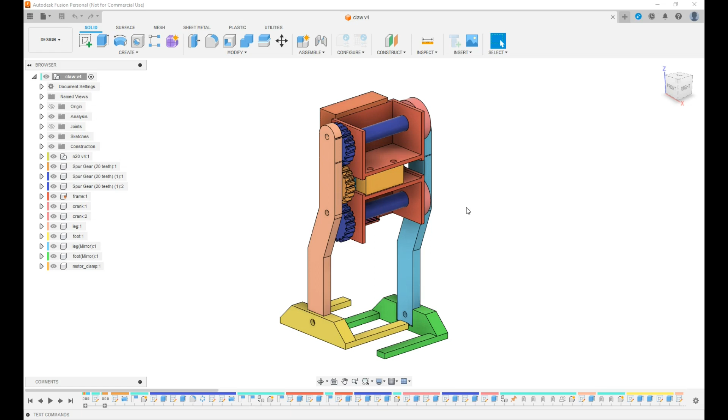This is part 3 of a video series I'm doing on designing a clawfoot walker, a mechanical toy in Fusion 360. In this video we're going to start by fixing some of the things we screwed up in our last video. One of the things we didn't get right was this crank, so let's activate it and isolate it.

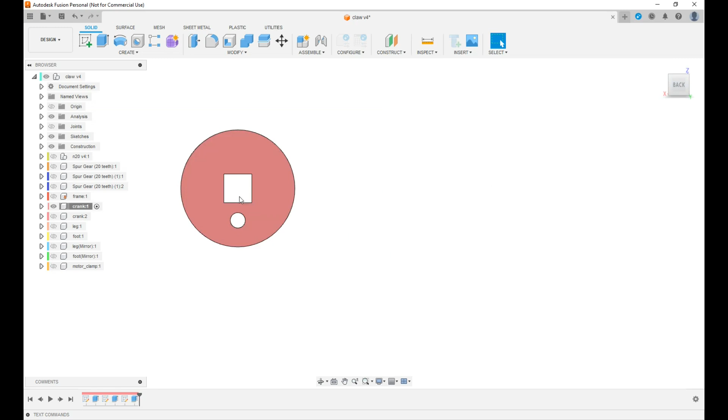The problem with it was this square hole that we fit our other shaft into is too loose. So where did we do it? I think we did it in the first one here, and it is this offset that we need to change. It's 0.2 now, I'll change it to 0.1. Make that a little tighter.

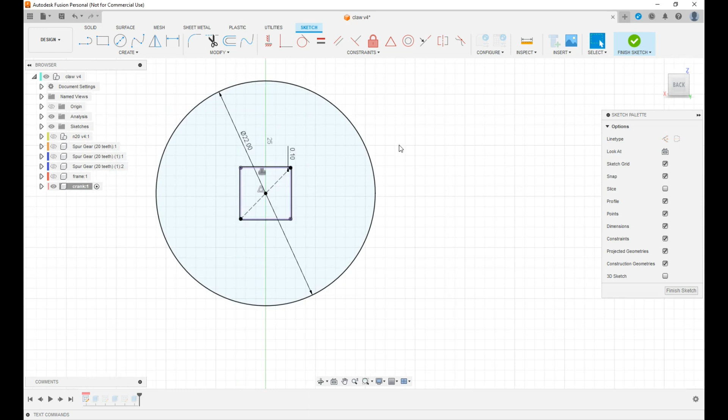The other thing I want to change is I want to add a couple of chamfers. We'll make it 0.6, and we'll put a chamfer on our screw hole, 0.4. Make it a little easier to start.

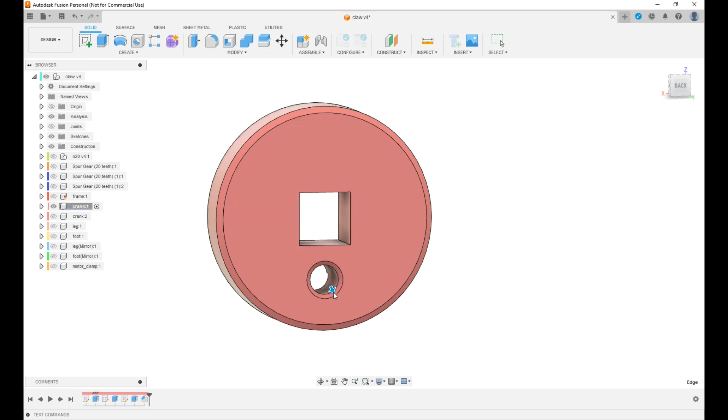Let's unisolate. Come back up to the claw, to the whole thing. Make sure we're at the end of our timeline, and you can see if the changes took effect on the other part because it's an exact copy of the one we just changed.

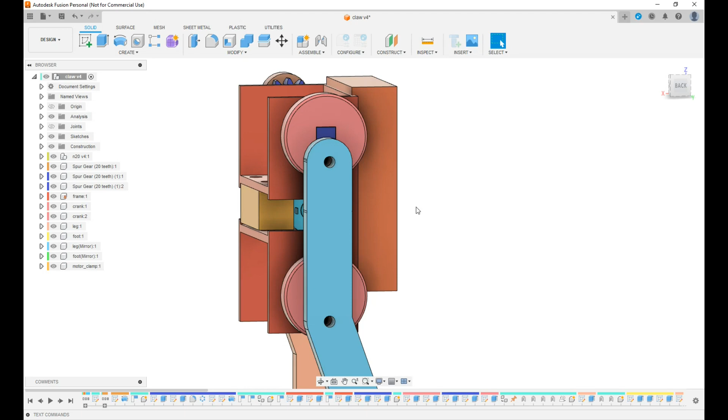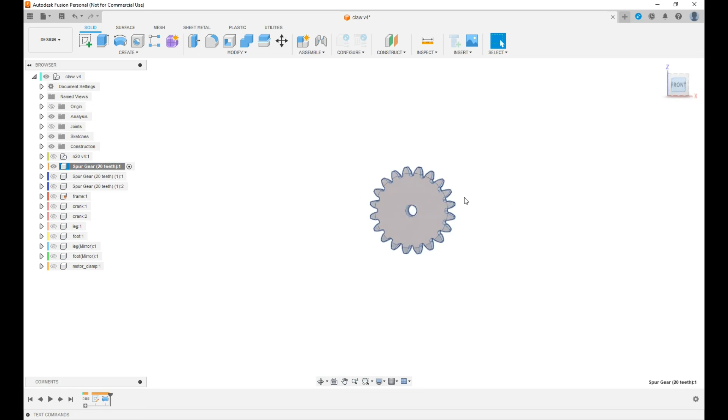Now we want to change this gear right here. Let's see, we'll isolate it. What I did wrong with it was I forgot to put the proper sized hole in it and the flat on it.

So we're going to project in this circle. We'll select it and make it a construction circle, dimension it, see 3.2.

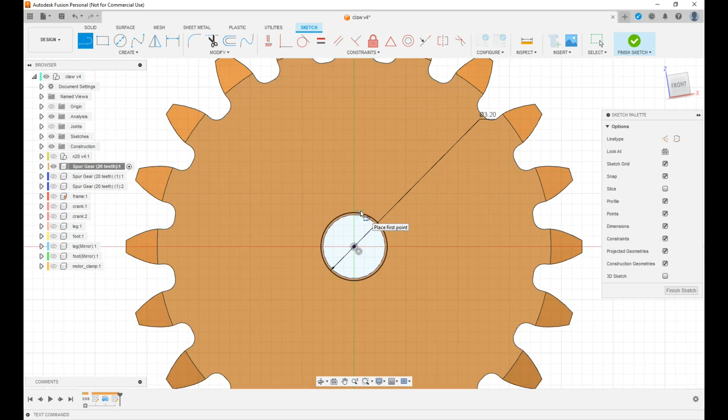Now we need a line to make a flat for the shaft. We'll dimension that from the center, 1.25. I think that's what I've used in the past.

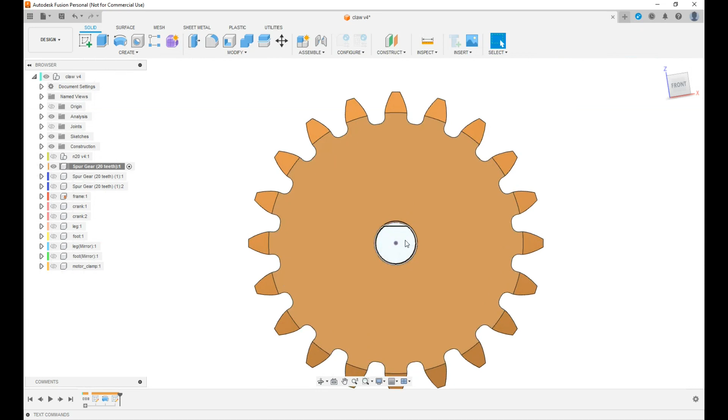Now we'll finish that. We're going to extrude. The first thing we can extrude the flat. Is that going to work? I think so. Distance to object. We want it to join. That's good.

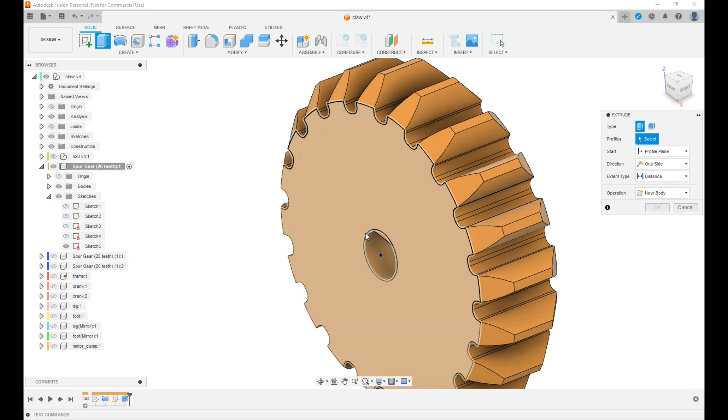And it killed our sketch, so let's bring it back. Extrude. Make that hole a little bigger. Distance to object back here. Cut. Okay.

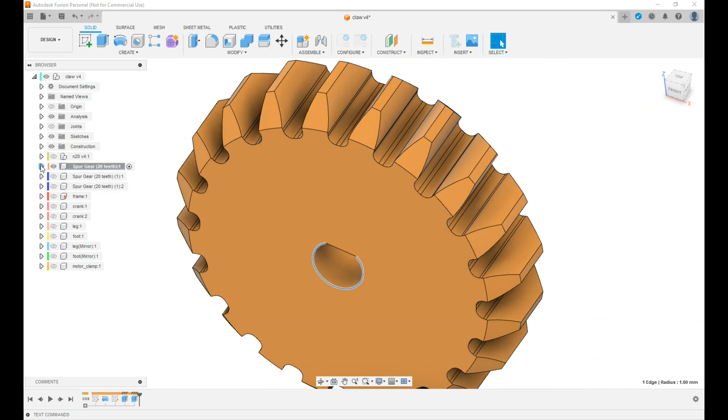Let's turn off that sketch. Select that and see if 1.6 radius, 3.2 diameter. Collapse that back and unisolate it. So I think that's fixed. Go back to the top. Make sure we're at the end of our timeline.

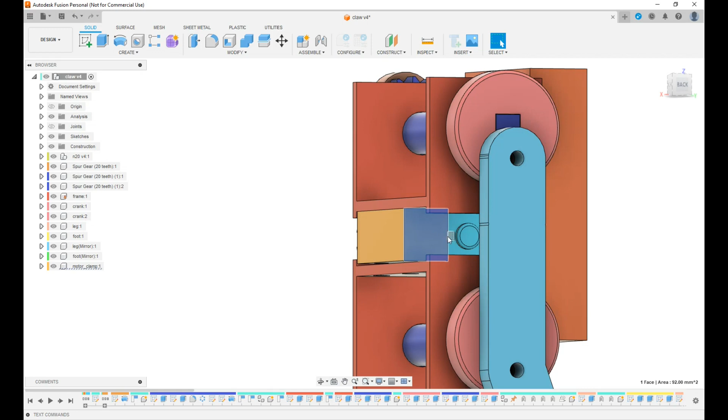I think I'm going to work on this motor clamp for just a second. I didn't like the way it was coming out here, it's too close. So let's activate, isolate it, and then we're going to bring back in that motor.

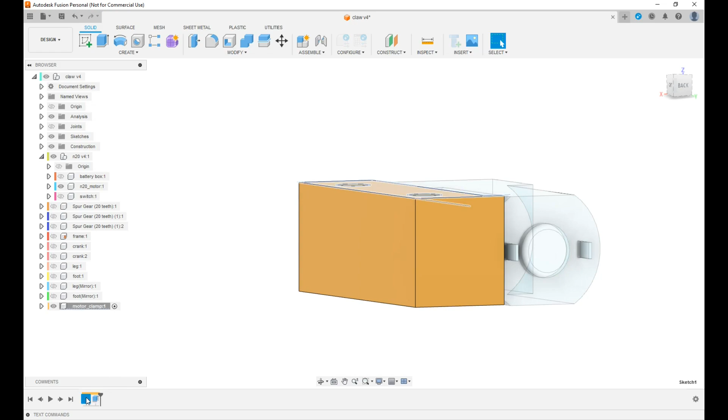See, let's go to our original sketch. Let's make this hang down a little farther even. 2. Well, let's go with 2.4. I'm going to make a cutout in this so that it clears that terminal.

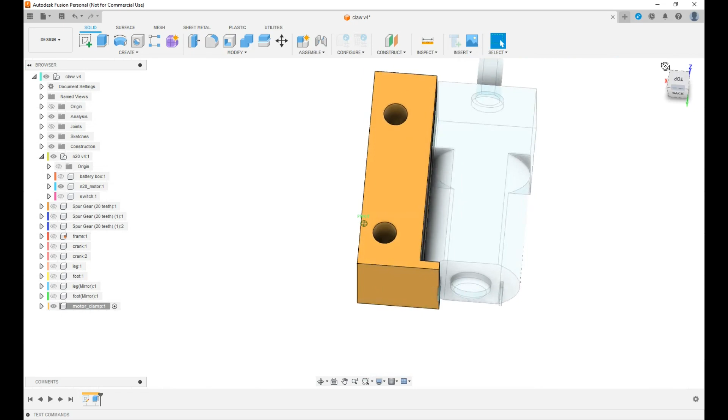Now I'm going to create a sketch here, project in this. We'll also project in... it'll be alright. It won't be perfect, but it'll be alright. I'll project in that.

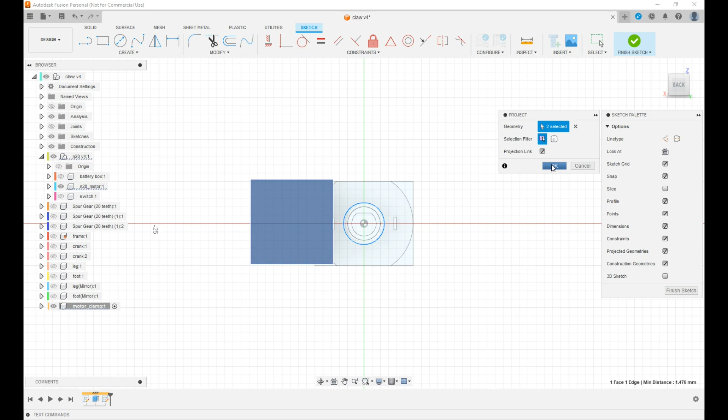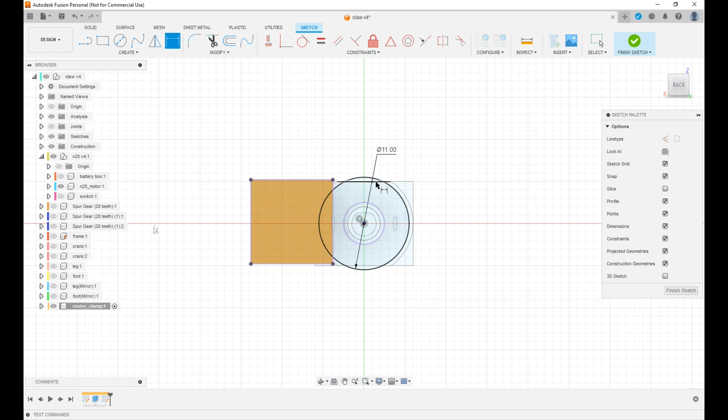Do a circle off this. We'll dimension it to 11. Is that going to work? I think so. Now we're going to extrude this.

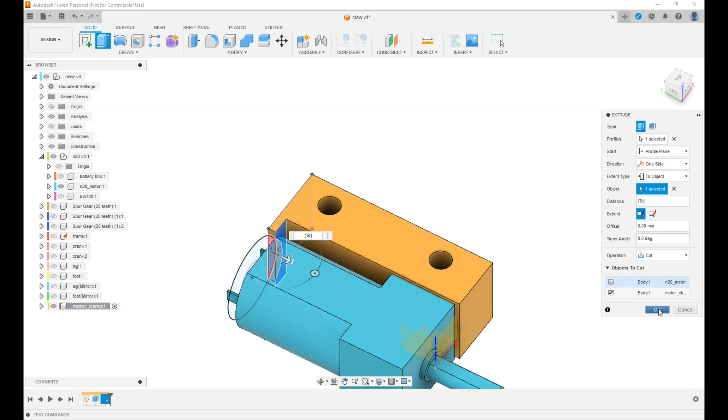Distance to object, this face right here. Now if we go down to objects cut, we don't want to cut our motor, so we need to uncheck that. We just want the body of a motor clamp. This is not centered perfectly, but for what we're doing, it's just fine.

We're going to unisolate everything. Come back up to the top. Make sure we're at the end of our timeline.

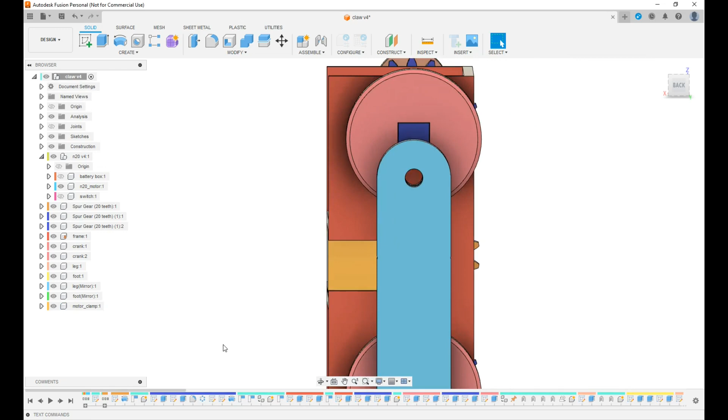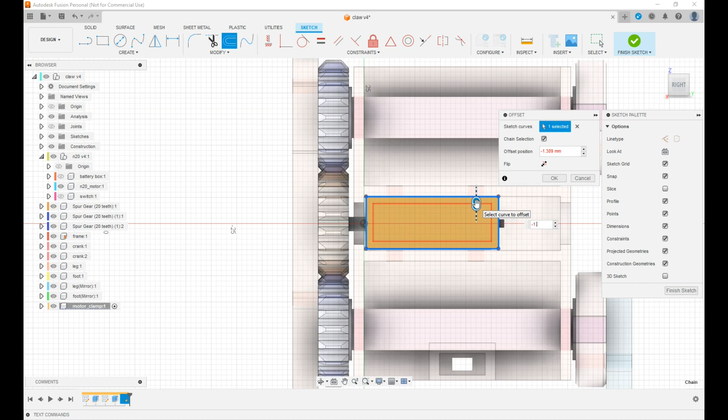Well, everything I wanted to do with this motor clamp, it's going to be pretty fast. I'm going to create a sketch on this, project in the geometry, offset it, minus 2 or 1.6. And we're going to extrude this.

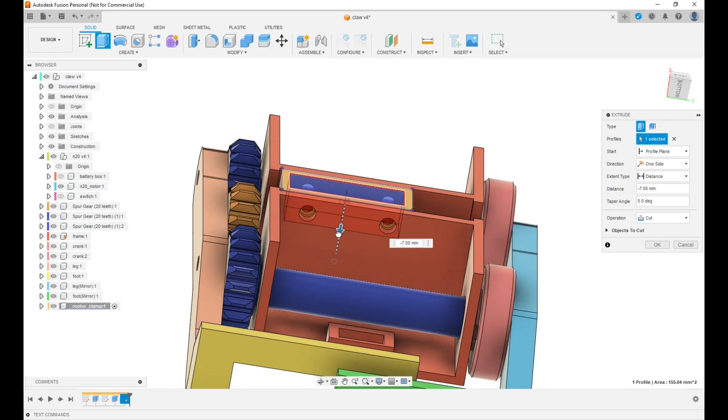I was hoping I could see that, but I can't. Minus 7, see what that looks like. Let's isolate this and see how thick that left our motor clamp here to here. 0.6. Yeah, that's not quite enough.

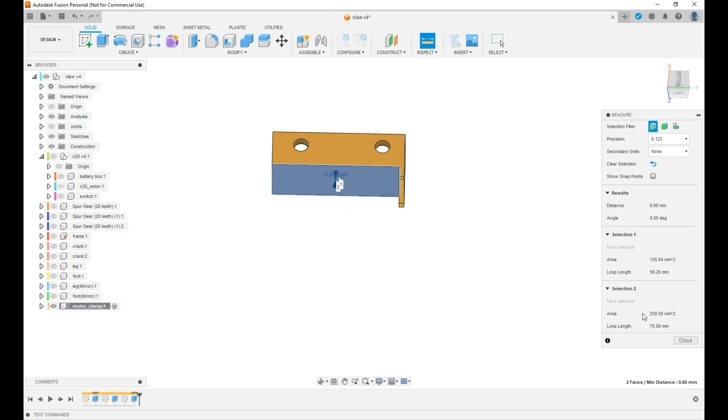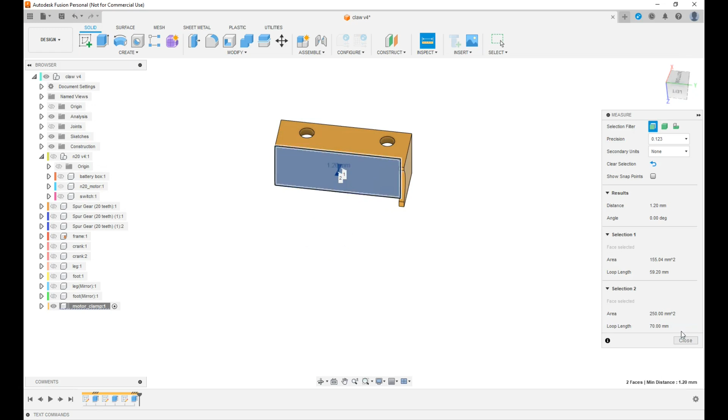Minus 6.4. We'll do our inspect again. 1.2 is good. Our holes I just did that so that this is not, the metal's not full of plastic. It'll make it easier because we're going to thread screws into that.

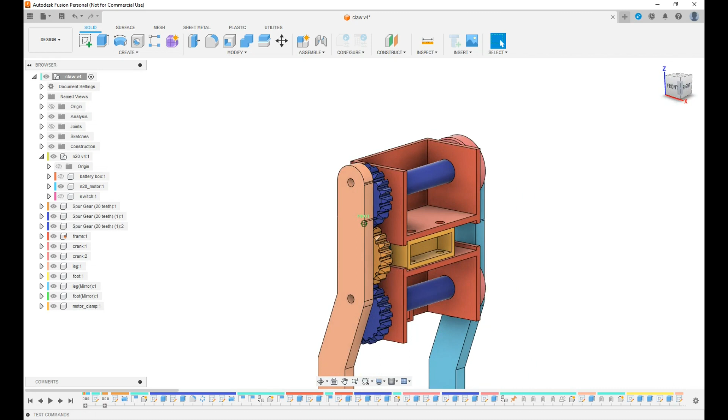Go back to our top now, end of our timeline. I have everything I need to fix, and this is going to be a little bit harder because it'll want to blow up our joints.

We have these holes and these legs are too small. I just use the projections off the gears, over 2.9 millimeters, and they need to be like 3.3. There's a couple of ways we can do this.

We can go back on our timeline and edit this one, which will, when we mirror it, will probably reflect onto this one, I think it will. But that's going to blow all our joints up because the hole that we jointed this to with a reference is going to be gone.

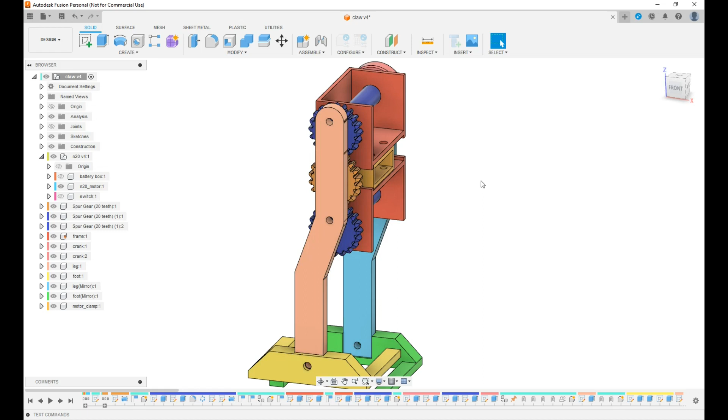I think what we can do is just edit each one individually. So let's go into this, create a sketch on that face.

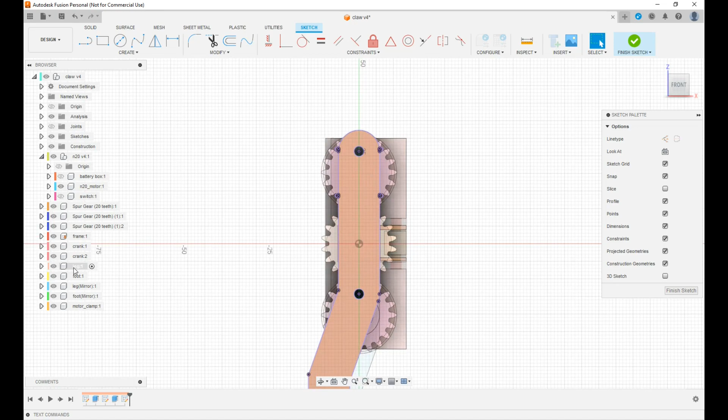We'll know on the first one if it's going to work or not. Project in that. Let's isolate it so we can see it. We'll make a circle here.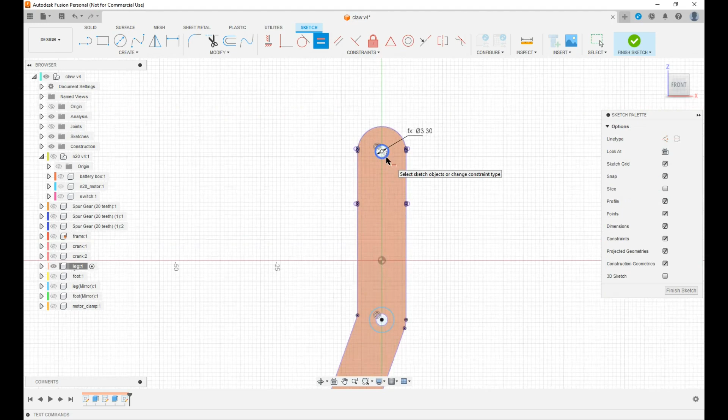Dimension it to our screw clearance parameter, should be 3.3. Alright, another circle. We'll just make it equal to the other one.

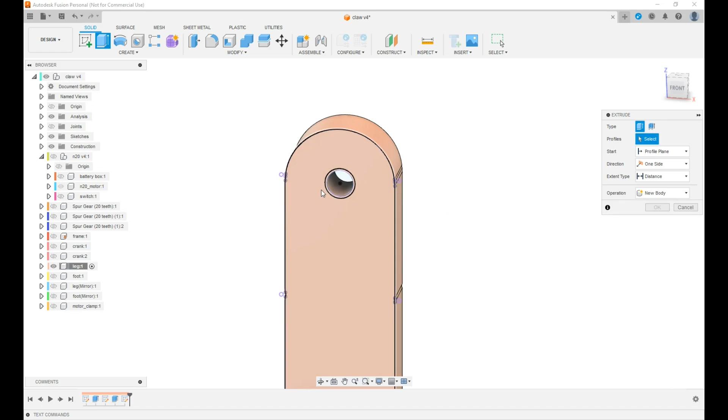Finish the sketch, it should be fully constrained, and extrude. It's going to be hard to select that profile. That. And that.

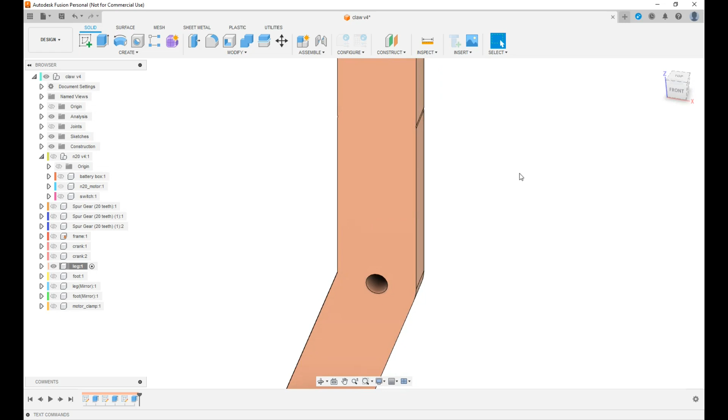It isn't complaining about us blowing anything up. Let's unisolate it, back to the top, into our timeline. Let's see if the joints still work. Let's see where they're at. Up here. Animate joint relationships.

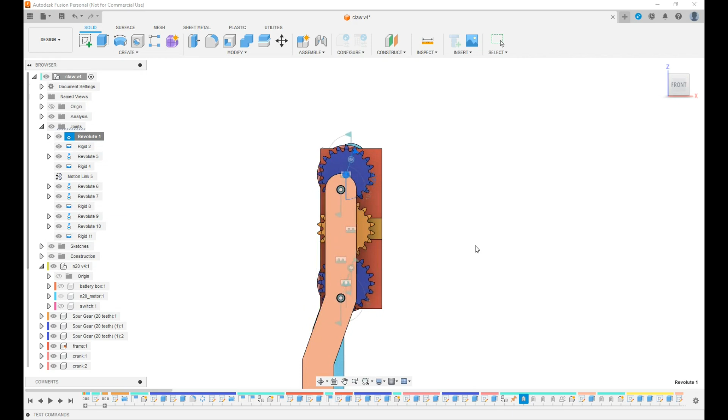If I went back and edited that whole dimension, I've done it in the past, and it seems to blow up the joint. It loses its reference. We're going to do that to this other side now. This isn't really the way I'd like to do it, but that's the way I'm going to do it. Otherwise I'd have to go back in and, what I've done in the past, deleted all the joints and started over.

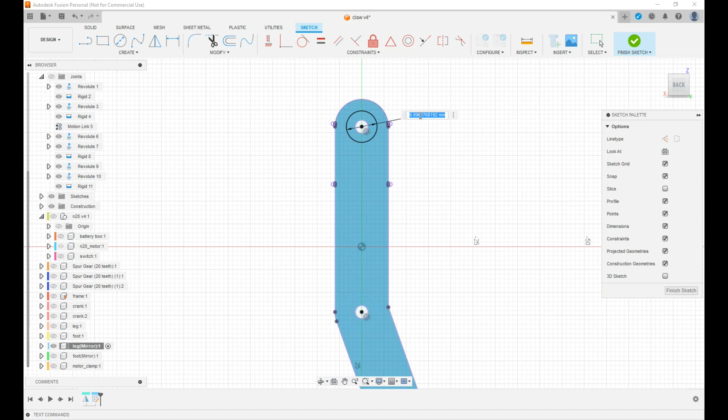So let's create a sketch on that, but I don't want to do that, it takes too long. Let's do the same thing we did on this one that we did on the other one. Circle, dimension, screw clearance, make them equal, and extrude them.

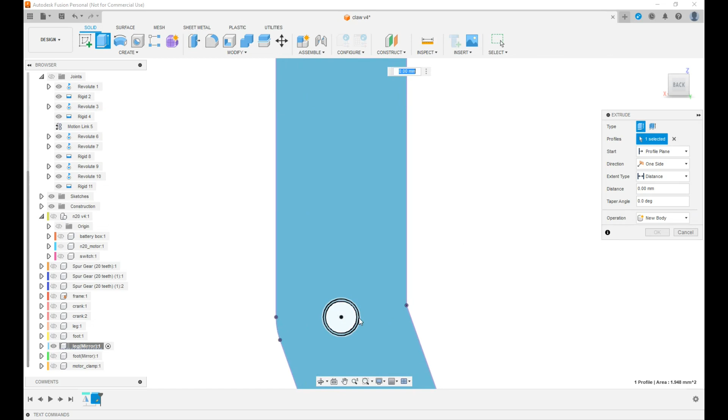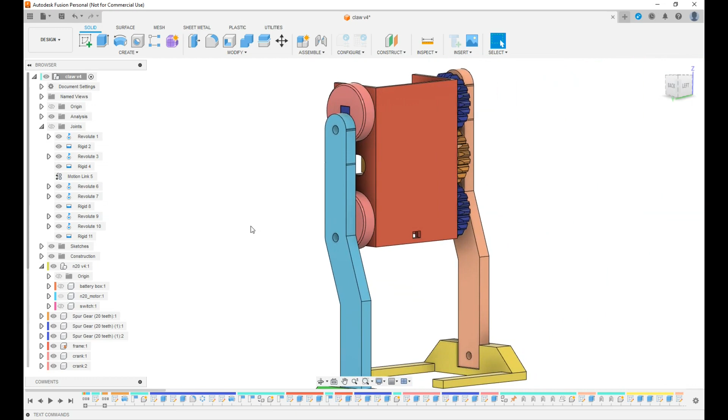Now we're going to unisolate. You always hit the home button if you get lost. So hopefully that's fixed our problem. 3.3, 3.3, let's make sure it still works.

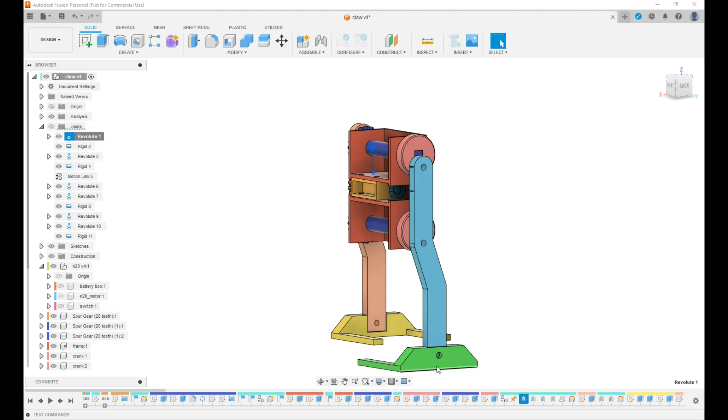I like to keep those joints working, because I can always go down and check and see if my feet are colliding. So I think cranks, motor gear hole, legs, and that motor clamp, those are the things I wanted to fix. So I'm going to save this.

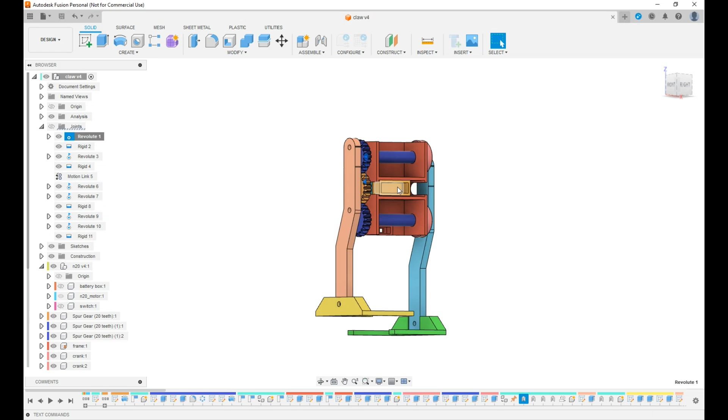I'm going to print the new parts. The parts will be this gear, and I'll just go ahead and print this motor clamp again, and these two cranks. I won't reprint the legs, they're kind of large, I'll just drill the holes out. I've already drilled a hole out in one. So I'm going to print the parts, and the next thing you'll see is the result of that in this video.

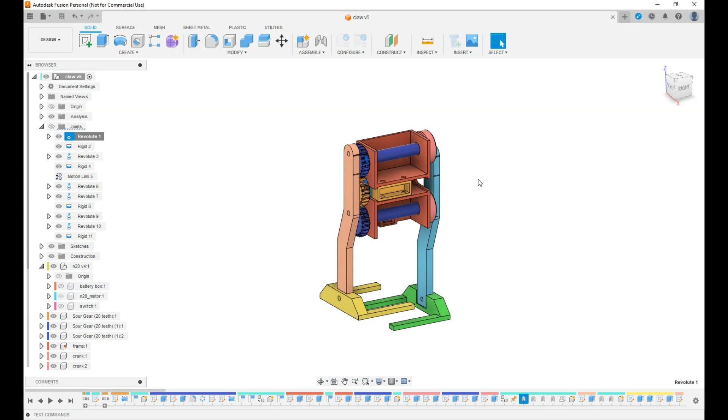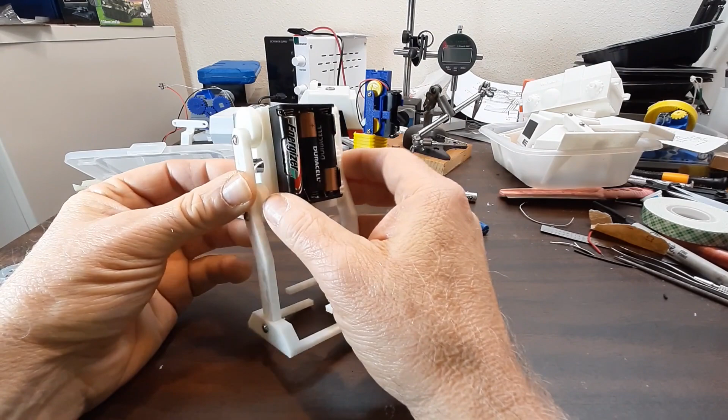So I've got this thing assembled. It went together pretty easy. These are the new parts: the cranks, this motor clamp, and this gear. The gear went on just about like it always does, it's a tight fit, so that's good. No problems there. These cranks are still a little bit on the loose side, one of them was anyway.

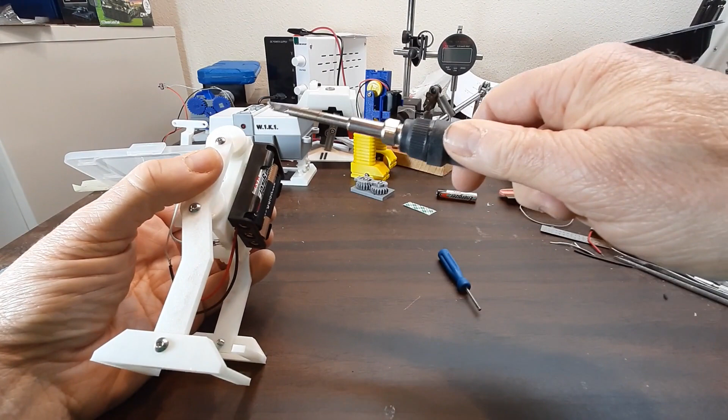What I did was, before I poked it on there, I just took the soldering iron, with this off, on that square part, and just touched it to make it a little enlarged, and then that pushed on there. If you were normally building this, it would be glued on anyway. So I'm just trying to get it to a point where you can see if it works.

I just drilled out the legs that had the small holes in them. The files that I showed, I showed fixing the parts in Fusion. And of course the question is, does it walk? Oh, I glued the switch in.

This is just a 30 RPM motor, that's what I had laying around. I've ordered some more motors, they're kind of expensive, like $5 or $6 a piece. But it does walk. The clearances look about like they did on the computer between the legs.

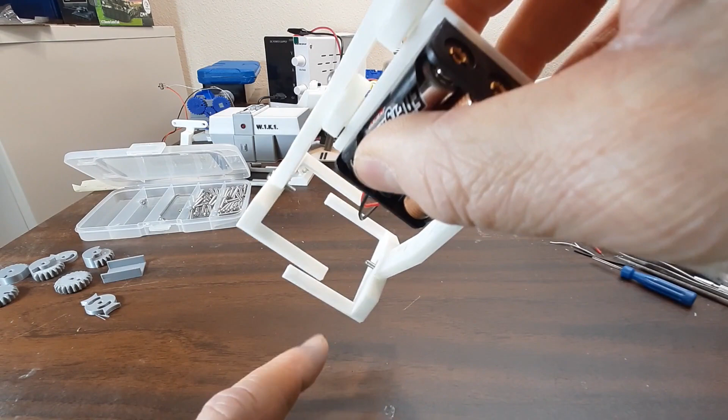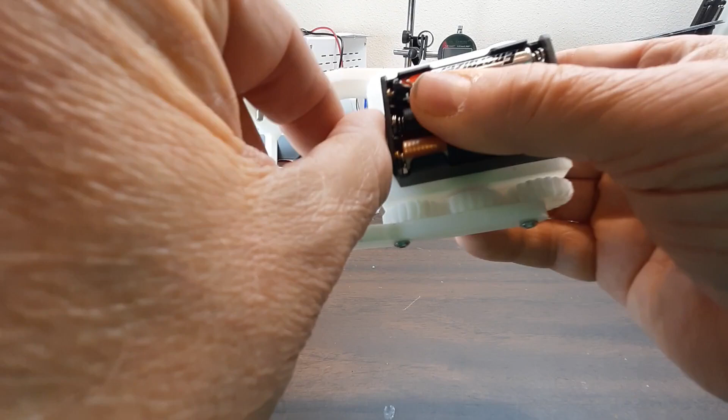As for stability, it stands on one leg pretty good. Front to back is real good, no problem there. I was worried about putting the battery up front, but I think putting a little jog in this leg balanced it pretty well. In this direction, it could extend this leg out a little, or this little piece out here a little more. Got plenty of room, I think it's okay.

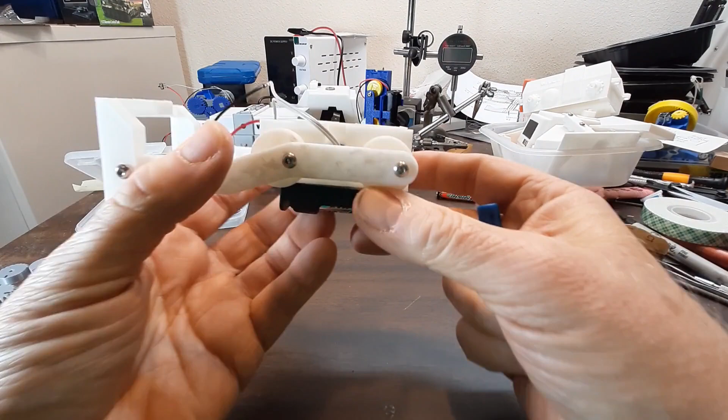So that's what I set out to do, show designing a Klann walker in Fusion, and I've done that. Oh, here's the motor mount, but it changed. I don't know if you can see in there or not. Came out about right, the way I mounted it, with a screw going this way and a screw going this way, the screw straight into this motor mount part.

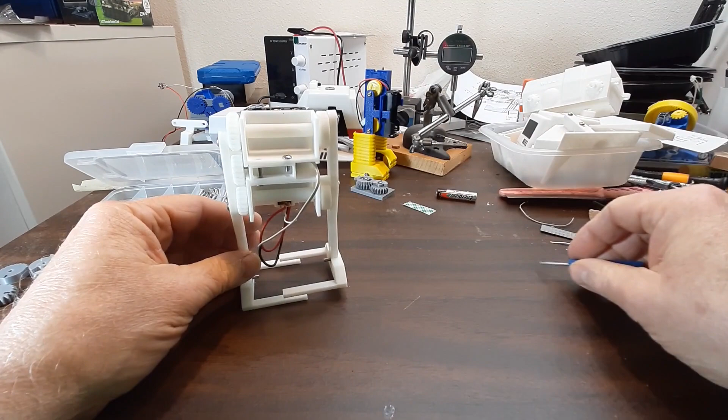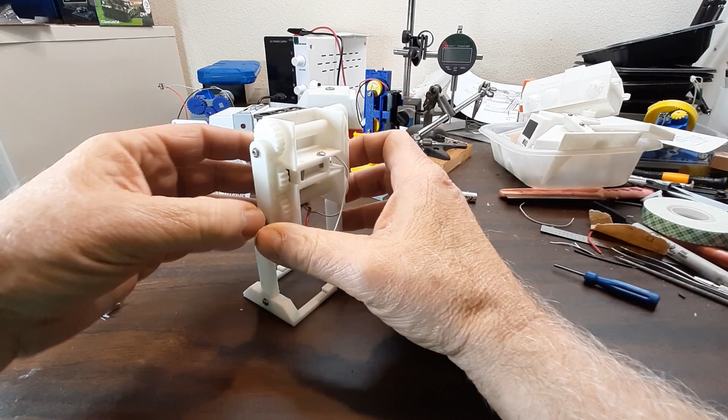I can't decide if I'm going to show making a body or not. That can be kind of involved. It's not that making the body is so much involved, it's just adding all the little details. Fusion 360 is really not a program designed to do things like that, but you can still do it. So I'm not sure if I'm going to show that or not.

This is basically just what I wanted to do with this video series. But if you want to see me make a body for it, leave a comment, and I might do it if anybody makes it to the end of this third video. Hats off to you, it's been a long, boring thing.